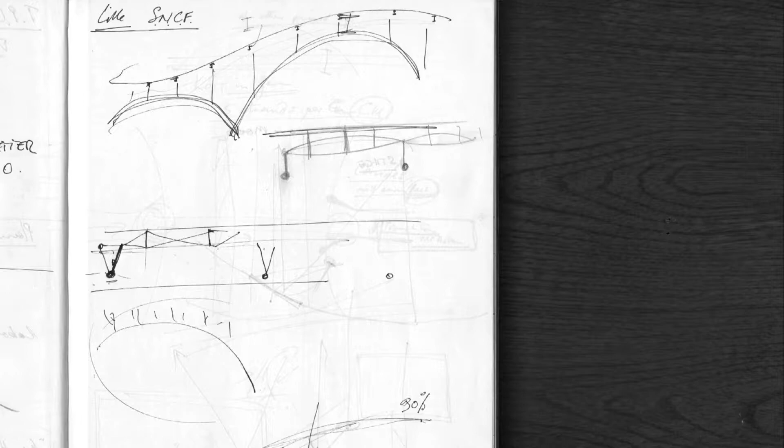So we have to work a long time in the virtual world. We tend to use a whole variety, and each of the disciplines in this room, each of the people involved in the construction industry, use their own sort of representations. Those are many, from very initial sketches to models, trying to figure out ideas, models that get more established, more firm, and representations. Now we're moving into virtual models, which are even more a firm representation of the geometric world that we live in.

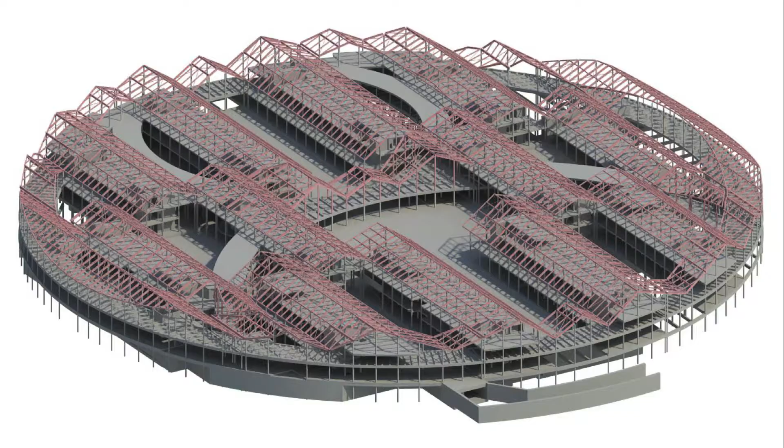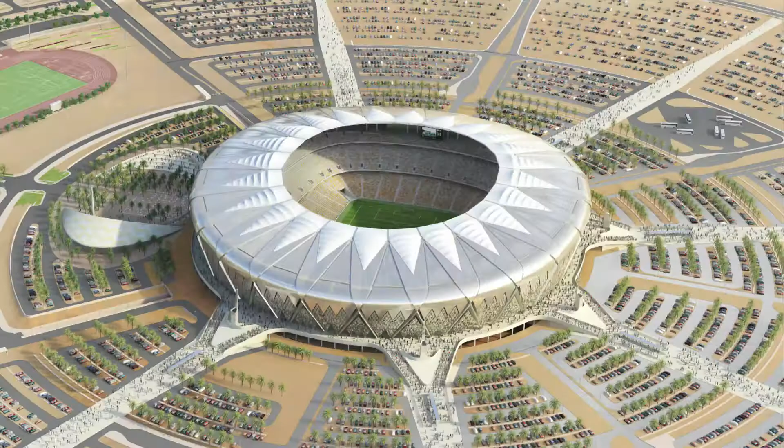So each discipline, and structural engineers have got their own ways of doing that, is choosing his own way of abstracting the real. In our case, we'll be using properties of materials, the sizes of the elements, abstraction of how the elements are connected to each other, so that we hopefully capture the real behavior of what we're going to build.

Unfortunately, it's not an absolute done deal that we understand everything and that we have a full representation of the real and the behavior of both structures and people. In the case of the Millennium Bridge, you all know what happened on the opening day, and clearly something had not been represented correctly in our virtual models of the bridge. So one might say that we have to learn about the real at all steps of what we do.

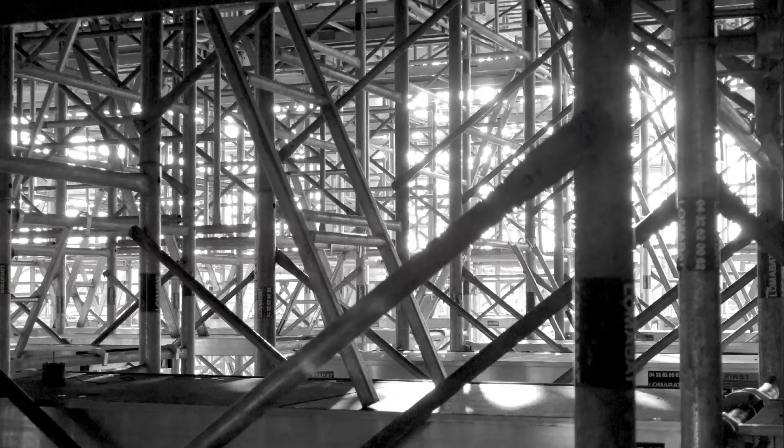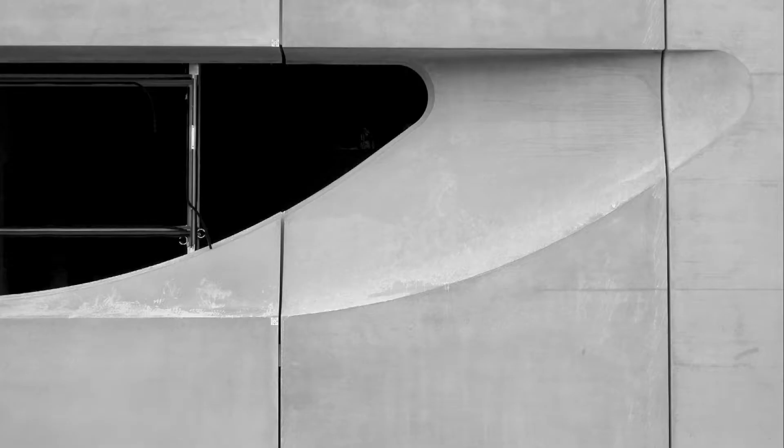Is it that difficult? Is it so painful to make all these pieces and assemble them? Is it something that we don't derive any joy from being involved in? I've always loved going to site. I've always loved going to the makers of our buildings. And I think basically the material side of what we do, and its very powerful source, nature, is extremely important.

We are rearranging nature when we build our buildings. We are taking materials and transforming them from their initial, slightly imperfect and slightly random aspects into something which is probably more ordered, more predictable, and that we can then calculate and build. But there is something to say for the imperfections and the natural qualities of what we do.

Nature can be absolutely amazing. Actually, a structural engineer talking about nature and material is nothing terribly original, but I'm afraid that's, I think, what matters to me, so you'll be having to listen to that.

What matters when we transform our materials is that we pay enough attention to the traces of what we've done, possibly. When we visit buildings, we often see the marks, small marks of what has happened to the material when they were fabricated, and it sometimes looks almost like a sort of abstract painting or an abstract piece of work.

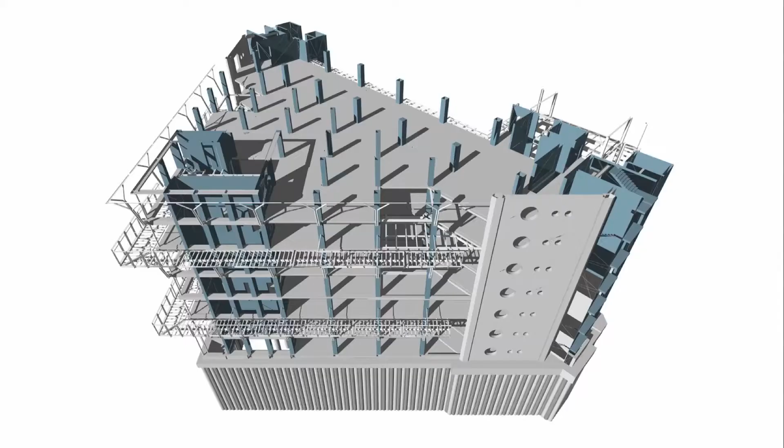When we build our virtual models or BIM models, which are extraordinary tools—I'm not ranting against those—it's much more that I wish they could do even more, that they could be more clever, that they could have a better representation of all the interactions and aspects of the act of building and materials. I believe they remain an oversimplification of reality, and they lack a certain amount of imperfection.

And that's kind of weird, but I was visiting one of Louis Kahn's buildings over the summer as I was preparing this, and just that tiny little nick of the concrete, which gives that tiny little piece of light on the surface, that gave me pleasure. You don't know how to capture these sorts of things in the models we do and in the work we do. So I believe there's more to it.

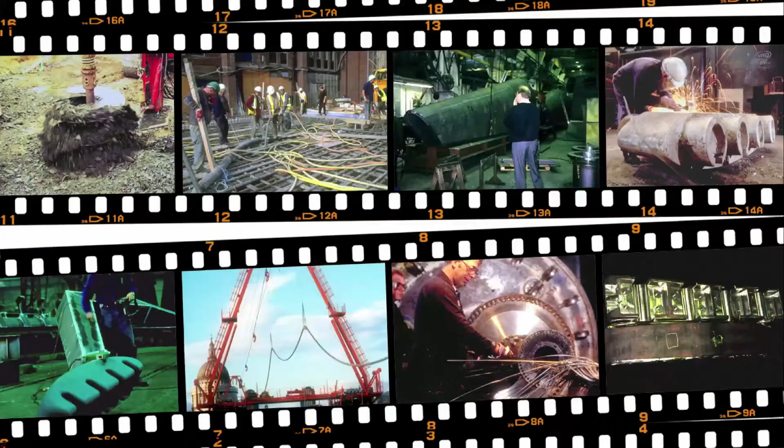Until our buildings are made the way they are made—fabricated of a multitude of pieces—I think there's a chance that these accidents, these happy accidents, these slight imperfections will remain in our buildings and in our enjoyment.

But there is a dream that actually the tools would remove that way of building, that we would be able to one day press a button and say print, that we would completely remove the part where hands are involved in the making, and just turn our building out of frozen goo, ink in a way, as we call it. I think the day we do this, or think this is the valuable outcome or aim of the latest technology, we will have lost a great deal of what we do.

So I really think we need to pervert our tools slightly and embed in them a lot more than what they currently have. We could maybe embed imperfection slightly. We could maybe embed natural textures to them, if that's what we're after.